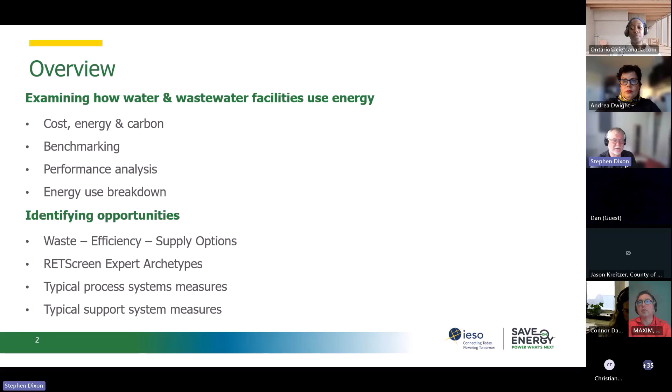Although process can use a lot of energy in these types of plants, what we found is that there's always a lot of opportunities in those support systems. Sometimes they don't see the same kind of focus as the process systems because it's not the core business of the plant. So great opportunities there as well.

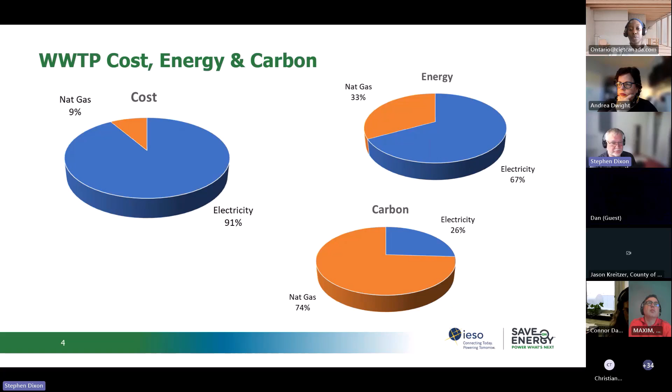So starting with these types of perspectives really sets the stage for what you might have to do, what you're going to go looking for, and the types of opportunities you're going to get into. So I always like to use these as a starting point.

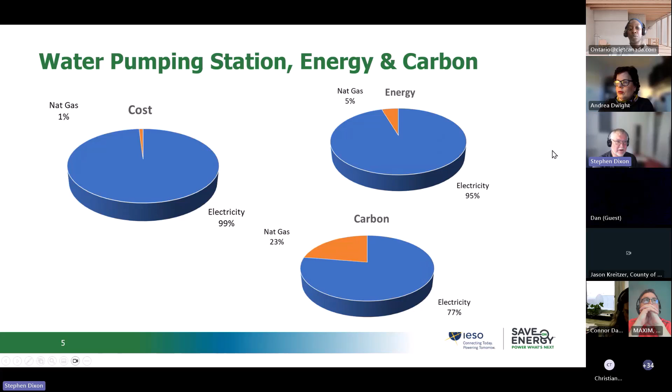The first thing we would do whenever we approach one of these plants is ask how much energy do they use, and how does that compare to the amount of process, to what they're doing. Typically, in a wastewater treatment plant, which I'm focusing on here, you would look at something like equivalent megawatt hours per megaliter, or gigajoules per megaliter. There are various different units, but basically the numerator is the energy and the denominator is the volume of water, wastewater, or processed fluids going through that facility.

I'll talk a little bit about performance analysis, looking at how that number changes over time.

But there certainly are ways within even Portfolio Manager to compare your plants to other plants, but also sector studies. And that I'm going to... go ahead.

Sorry to interrupt, Stephen, but there was a question in the chat, and I think we can answer it quickly now.

One question from the previous slide was: where is gas being used in a wastewater treatment plant? Typically it's used like in many other facilities in rooftop units to heat spaces like offices, but it's also used in the process, often for the digesters because they have to be heated. So often you'll use natural gas to heat boiler water that then heats the digesters. Sometimes you can use the biogas that comes from the digesters to fuel the boilers, but often it's natural gas as well. There are a few different places it's used.

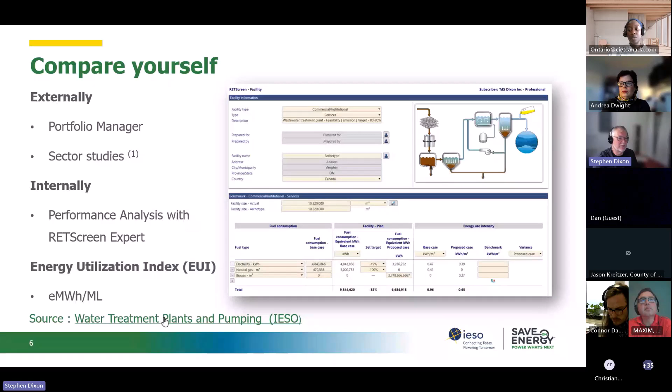All right, so Portfolio Manager does have allowance for these types of plants. Probably not quite as deep as you'd be able to use it for other buildings as a benchmarking tool, but certainly for sector studies. The IESO link here is a study that IESO did a few years back, which actually digs into the energy use in these types of plants. I'll give you a sample of what that might look like.

So benchmarking is always a really good place to start. We did a treasure hunt on a plant that was operating at 0.4, and we still found about a 15% opportunity through a lot of operational means. So just because you're operating really efficiently today doesn't mean you can't find opportunities.

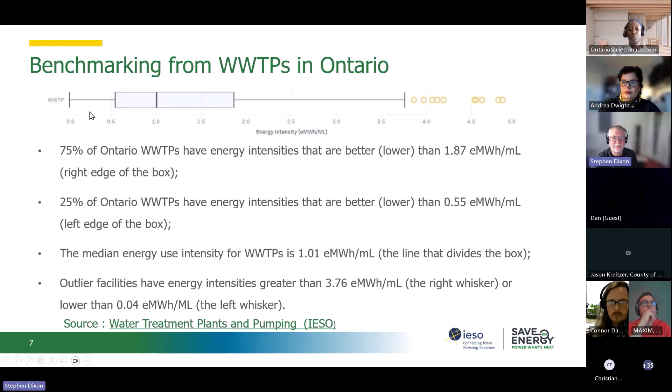So it's always good to go back and look historically. Sometimes it doesn't go up, sometimes it goes down, and you've made improvements you don't know about. This wasn't a bad thing for them, but it allowed them to establish a new baseline for performance monitoring in the future. So comparing a plant to itself over time is always a good thing.

You can do it on wastewater, which is what this is, but also on water treatment plants as well. I always like to make use of the interval data. Stephen, go ahead, there's an interesting question here. Maxim asks, why and how is weather a driver to electrical consumption?

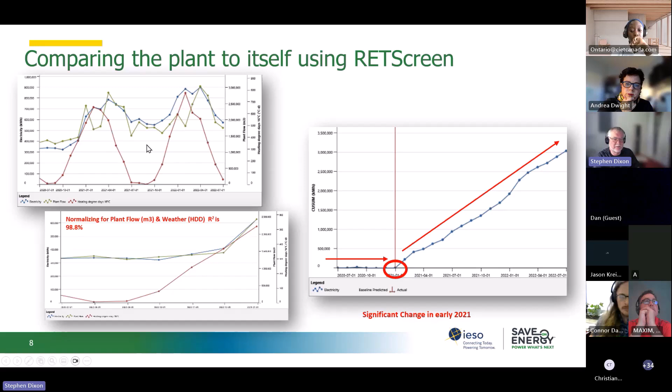And there are always really good correlations in wastewater treatment plants in particular between flow and weather and electricity use. You can see that here: the green line is plant flow, the blue line is electricity, the red line is the weather. So they're both significant in the equation for electricity, and RETScreen does it really nicely. You get multiple variables. Max, you probably already know that.

Right, so not just looking at your overall data as benchmarking, not just looking at your monthly data, but now looking at that fine data. And Andrea, you've got some great examples toward the end there of where you did this in plants, and the savings opportunities that came out of it because of that surprising thing called electric heat, maybe in a plant.

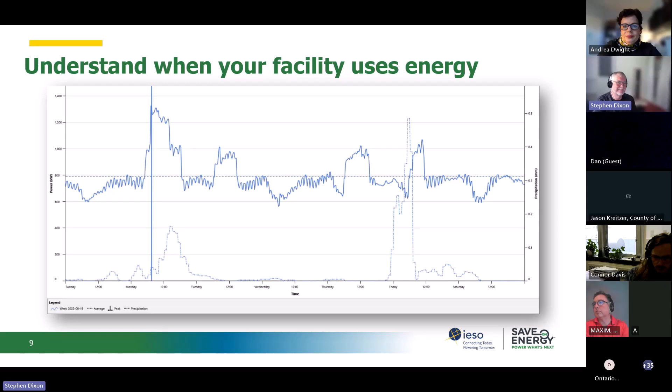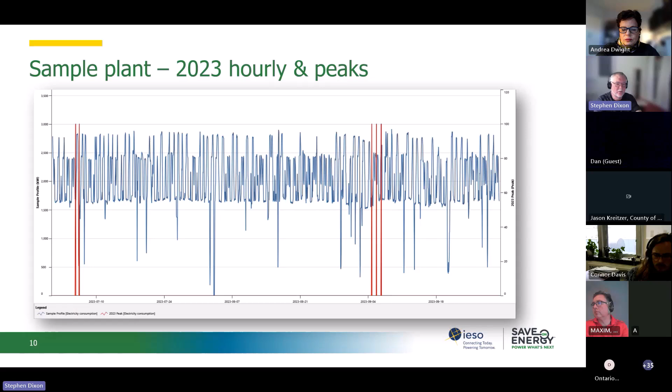The other thing, if your plant's big enough—in Ontario, under Class A, meaning if you're over a megawatt, you basically pay the global adjustment based on your contribution to the 5 top peaks—the interval data is very important there. We've done a lot of work with water pumping operations, larger ones, where we're looking at their impact and designing strategies for overcoming the impact they're having on those 5 top peaks.

That is, managing their response around peak times. We worked with a couple of water pumping operations, and they found it extremely valuable to be able to produce these graphs and put them in front of operators. The operators start to understand what they can do.

So again, that's all part of what we call our energy treasure hunt, where we're working collaboratively with the operational folks in the operation. It's about really bringing together the energy knowledge with the operational knowledge of the plant. I have a fraction of the knowledge of the operation of a wastewater or water pumping operation than the operators do.

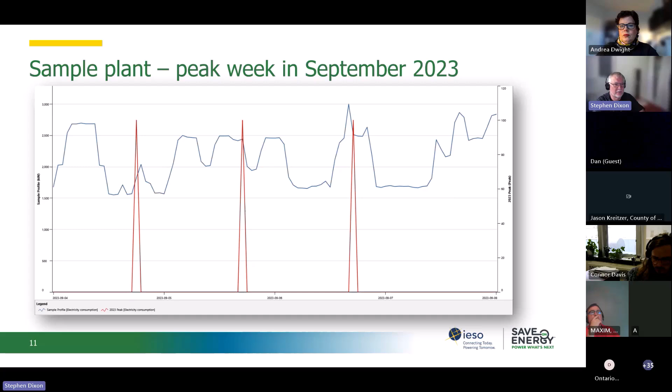They have a fraction of the knowledge of energy, but if we can come together collaboratively, I think this is where we can really find a lot of opportunities. And so I use the interval data to do that.

This is kind of neat. Polka dots? No, this is actually what we call a heat map, where I can look at the whole year. This is from a real wastewater treatment plant operation back in 2022, 2023. So here we can see the whole year. Every pixel is basically an hour in a week, and then we've got weeks across the year. So it's very easy to look at it. Now, in this case, it's relatively random, but sometimes you can see some very interesting patterns that emerge.

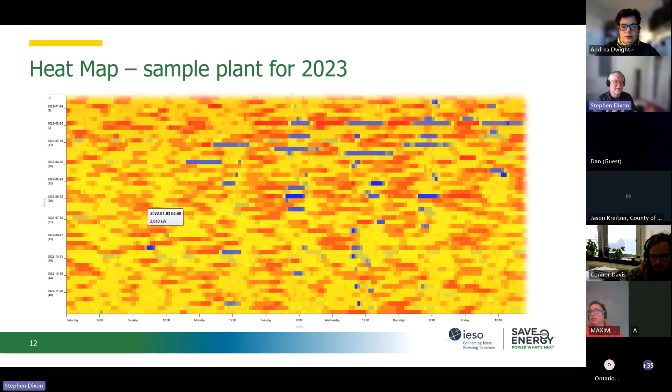So again, really good tools for digging into interval data, really understanding how your plant's using its energy, understanding where it's all going. And Andrea, you'll speak to this later, realizing how much you're actually using for space heat. Maybe it's a small percentage, maybe it's a large percentage, but being able to break that down.

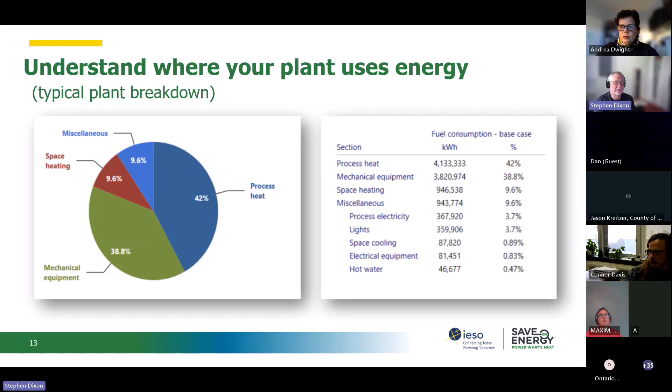This actually comes from some of the archetypes that we've created in RETScreen, which allow you to look at an archetypical or very typical plant, and then maybe start to model your own plant using these tools as well. So RETScreen does provide a pretty detailed breakdown. This is kind of like an audit in a box, in a sense, with the archetypes that are available.

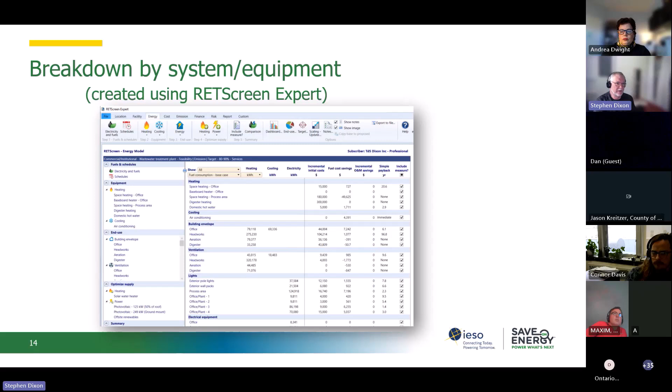When it comes to opportunities, and Andrea is going to get into the bulk of them here, but basically what I like to always think about is 3 priorities. Waste is the first priority. Energy you don't need to use, turning things off, turning things down, and properly controlling things.

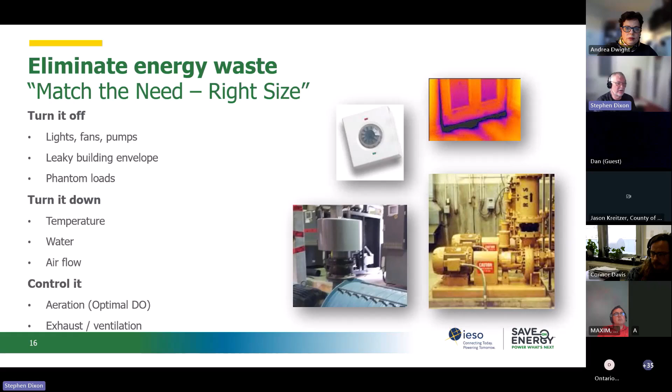Andrea will go into the details, say, of aeration and exhaust and ventilation in these plants, but basically it's about energy that we don't need to use. There's no use in over-aerating, because that can actually be as detrimental as under-aeration too. So again, making sure that we are meeting the need head on, whether it comes down to lights or temperatures or aeration or other types of energy use within the process.

Improving efficiency, how well we convert the energy from the purchased form, largely from an operational standpoint. If we have combustion equipment, we want to make sure that we're keeping it tuned up and controlling that equipment properly. Obviously, in general, we're moving away from combustion and the use of natural gas, but there's still a lot of opportunity in those types of systems.

Andrea, you talked later on about looking at it from the energy lens and realizing that pumps are not being operated in the right part of their curve, and resequencing and optimizing the operational strategy of the plants to find opportunities as well, without actually changing a pump, just utilizing pumps in a different way. So you're actually optimizing where they are in their curve. And then there's all the technological opportunities, but I like to focus on operation, maintenance, and optimization opportunities first before we spend capital.

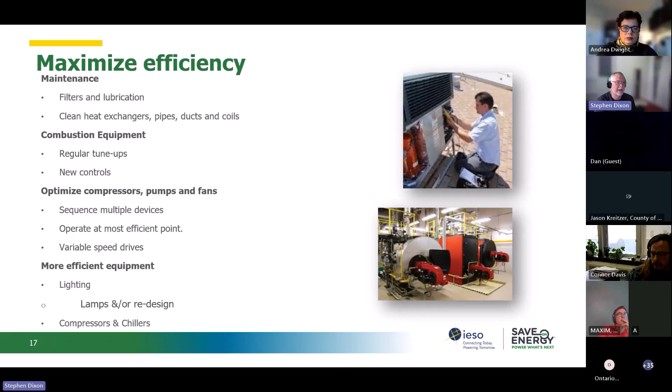But Andrea, you've got some ideas around how we can use technology to improve using capital as well. And finally, the supply side. So after we've reduced the waste and improved efficiency, we want to turn our attention to things like renewables. I put heat recovery in this category, the use of heat pumps, even biogas alternatives. What are we going to do with that biogas? Can we use it? So there's a couple of questions here.

How long can a plant turn off the blower to peak shave without compromising aeration? There's a great question there, Andrea.

Well, that's not one I can answer in 1 minute. Every plant might be different. There is honestly a period of time that you can manage a process without aeration. But here's another problem: not worrying about DO, you have to worry about all the solids dropping to the bottom of your aeration tank. So certainly you can pare back your blowers, but you really shouldn't turn them off, because you need to keep all the solids in suspension, if there are any, especially with a fine bubble. So I'm not going to get into that today, but I can take this offline and talk to you about how you might want to determine that for yourself on your specific process.

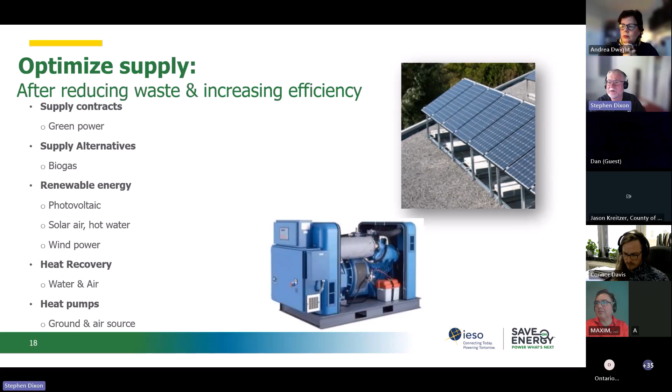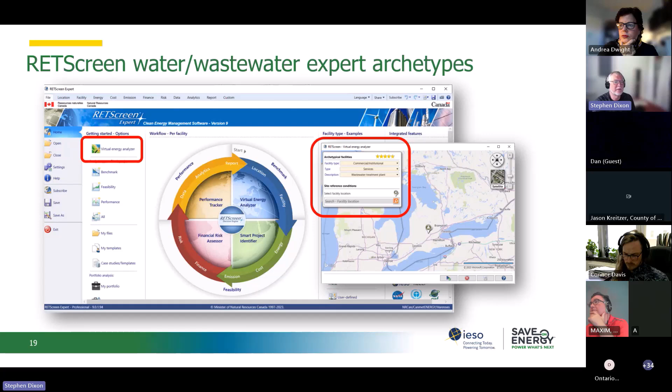Andrea, we're going to move on to your section pretty quickly, but I want to point out that even if you don't have a RETScreen license, you can download RETScreen and look at the archetypes available in the virtual energy analyzer. These are 4 predefined buildings: we built 2 for low energy and 2 for low carbon, one each for water and wastewater treatment, and they get into a lot of detail.

We analyzed a number of plants when we built these, trying to create archetypes that were typical—that's the definition of archetype. Not only do we show where all the energy is going, but we outline a number of key opportunities, so you can get a sense of what those opportunities look like and what the financial results look like for those types of opportunities.

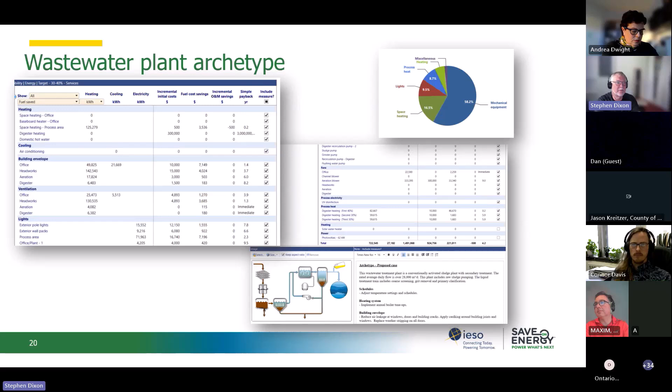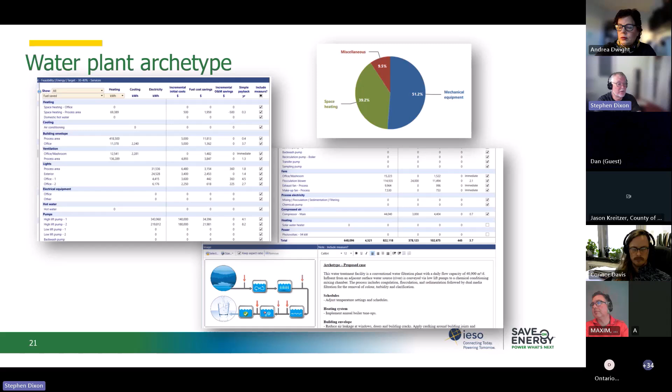There's a water plant archetype and a couple for wastewater as well, so have a look at those if you're interested. They give you a leg up. If you haven't done an audit on one of these operations, it's a good pro forma layout for doing an audit to figure out where all the energy is going and what the opportunities can be.

That leads us to more detailed discussion on some of these measures. Andrea, you're going to go through pumps, blowers, aeration, and UV systems. You'll look at variable frequency drives, and the idea that even though you can't reduce the number of pumps and maintain certification, you could add a pump of the right size for a particular function. Also making sure in your UV systems that you have turn-down—do you actually need full power to the lamp all the time?

Is there a way to actually modulate that or moderate that based on what the requirements are? And that whole idea of matching the requirement is a strong theme of a lot of things that you've done in these plants too, is to optimize the operation.

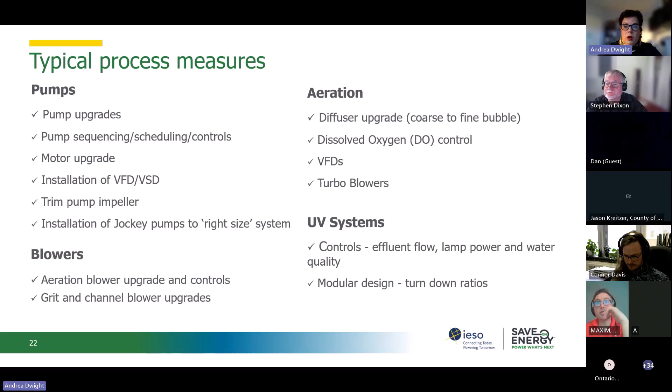Where I want to start is in the water side and water distribution and pumping, because I think that really affects everyone. So if you want to take a look at your water system, if you haven't already, I'm sure that it's operating where it needs to be from an operation standpoint. But if you want energy efficiency, you need to look at it from the energy lens. And there are some really quick things you can do that make a huge difference, like really pulling the pump curves from all of your pumps and making sure they're operating at the highest efficiency ranges, especially if you've had them for a while. Operation may have changed a little bit, and optimizing that is really important.

And the pump curve is there on the screen. We all know how to use those. But I also would say there are a few other things. If you have an older system and you have pumps where the flow is being controlled or throttled by downstream valves, that needs to be reviewed and updated as soon as you can. It is a very energy inefficient way of pumping water, and you should be replacing that kind of method of control with VFDs as soon as you can. Also, basic stuff like trying not to run your pumps in parallel, because that's very inefficient.

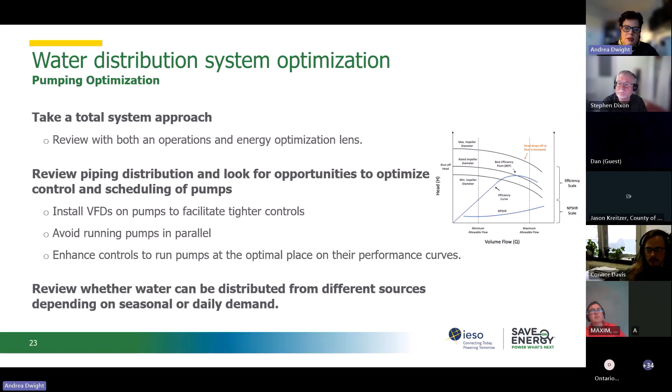Enhancing your controls and really looking for the optimal way of sourcing water to your water towers and through the system. So to go on with that a little bit, to speak to what we were talking about earlier, I think it's really important to be able to see what's going on with your pumps, especially your bigger pumps. So making it visible. If you don't have meters or sub-meters on your larger motors, I suggest that you actually install some, and you don't have to go for the financial grade expensive energy meters.

You can use amp meters, put them on all the 3 phases, and you could get wireless ones, and they can show you what's going on when your pumps are going on and off, and how much of a load they're carrying, so that when you start optimizing and looking for ways to make sure you're using the least amount of energy, you'll have a way of tracking it. Of course, VFDs already track energy, and they can be hooked up to your automation systems if you have them available.

And so what you really need to do is look at not just one pumping station at a time, but after optimizing a pumping station, looking at the whole system. Can you pump from different pumping stations at different times of the day or night? Which pumps are the most efficient? And try, of course, to keep your pumps as fully loaded as possible. In general, pumps that are loaded above 65-75% are the most efficient. Anything lower than that, and you're losing process efficiency.

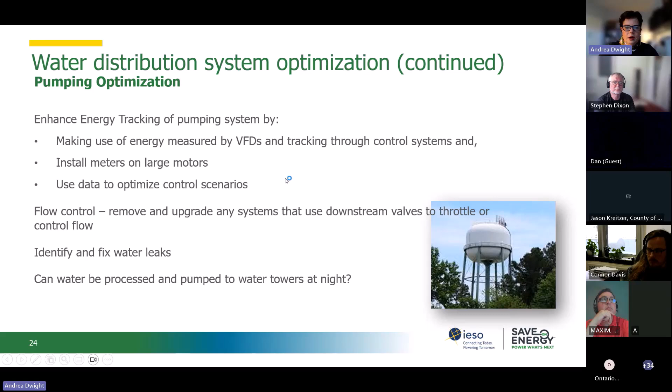Okay. So this is just a little example of an operations team I was talking to last week that had already done a few things with their distribution system. They'd removed some throttle valves downstream of the pumps and replaced the pumps and motors with ones that could handle VFDs, and also had looked at how they were staging the pumping, so it's optimized within some of the pumping stations. The next steps we had discussed were, again, looking at the pump curves and looking at different pumping stations to see if they could coordinate or stage the pumping from the various pumping stations, as they were all going to the same water tower.

So again, it might take a little bit of time, but it'll be well worth your time to take a look at that, sequencing properly.

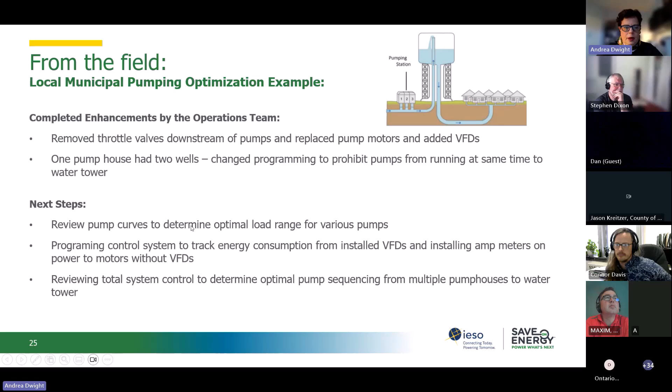So I'm going to change over very quickly to wastewater. And I wanted to talk about an example of waste that Stephen spoke about half an hour ago, when you're running more equipment than you require. We walked into an older wastewater treatment plant, and they had several grit chambers, I think 3, and they were using 2, and they had 2 blowers running.

And we determined that in actual fact, they'd been doing it for 10 years, and they put it on probably because of an issue within the operation, but then left them on. And we determined that they only really needed one of the 2 pieces of equipment to be run. So we saved a fair bit of energy by just shutting one of those blowers off. And of course, we had to go back to first principles, make sure that we were delivering the right amount of air to the system and it was well maintained.

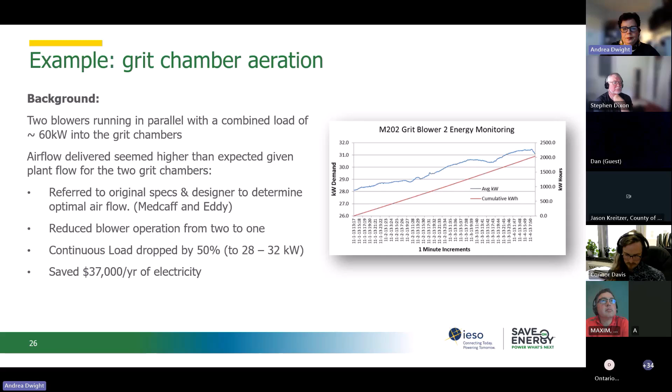But it just speaks to always questioning in your operation whether or not circumstances have changed and whether or not you really need to be operating all the equipment that you've got, whether that can be trimmed back to just what is needed.

Yeah, that's something that we see time and time again, not just in these types of operations, but sort of questioning the status quo, right? And I don't think it's meant to sort of accuse folks of doing the wrong thing. It's more about, is there a better way to do it, right? We've done it that way in the past, but maybe things have changed, and we find many opportunities through that type of approach.

So this is just another example of a plant in southern Ontario we were in, and the RAS pumps were very, very large. And that's very typical in most wastewater treatment plants. We plan for volumes that are for years to come. But right now, often the average day flows are much lower than the peaks or the design criteria.

So we had a pump that was running at 450 liters a second, but we had pared it down to 250 liters a second, and that still was more than we needed. And the system efficiency was quite poor because of that.

So what we were able to do in this case, I don't know whether it's in all cases, but most ECAs will allow you to put in an additional pump like a jockey pump if you have physical space for it. They found a pump on site, they installed it that was right sized, and they were able to operate at the right place on the efficiency curve.

So they certainly saved energy, but the best thing that they found was they were able to better control their sludge blanket, because they were running at the maximum turn down ratio. They had no flexibility to manage their operation. So this gave them an operating range that allowed them to steady state their system.

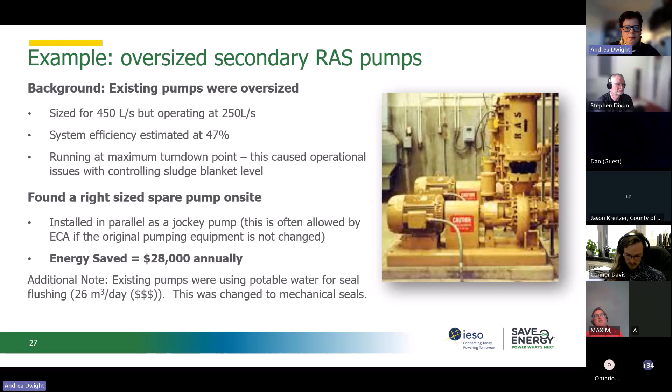Okay, the elephant in the room in wastewater is aeration, but really it's any kind of system that moves air. It's very inefficient. It's also very necessary. So it could be blowers that you're using for channels, or it could be aeration, or it could be just compressed air in your maintenance shop that you use to blow stuff off. It's very inefficient. So you have to make sure that you're using it as preciously as you can and using only as much as you need.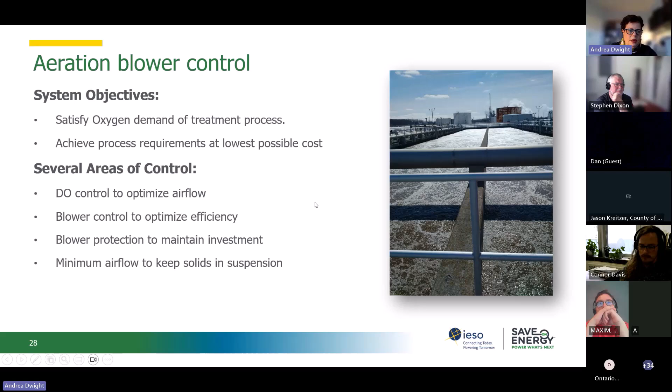So there's several areas that you want to focus on that I think are very important, including controls, and let's get into it a little bit here. So DO control: you want to make sure that your sensors are maintained. You may think that just a small amount of drift won't make a big difference, but it does. The location of the sensors is very important.

And also, if you have multiple basins and you have a header with automatic control valves on that air header, consider looking at most open valve control, which, I won't go into detail now, but it really keeps one of the valves open at all times, the one for the basin that needs the most air. And it reduces your system's pressure and improves your performance across the board.

The other kinds of things: if you have fine bubble, diffuser cleaning and maintenance, control valve maintenance to make sure that they have a full range, and air balancing of your system is really important. Right sizing, turn down ratios.

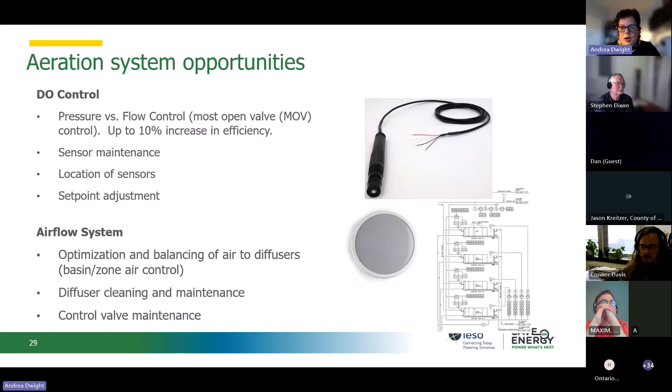Now, I remember that one, the energy treasure hunt, the energy scan we did outside of Ontario, Andrea, and they got 11% savings out of that MOV control, right? I remember that specifically. So yeah, 10% is pretty close. It takes a little bit to get it put in, but it's very successful.

Energy savings. A few obvious things. If you have mechanical aeration, then you should be looking at higher efficiency blowers and maybe fine bubble. But if you don't have the funds to do that right away, then make sure you have VFDs on your blowers, make sure you have VFDs on your mechanical aerators, and ensure you have filter maintenance.

So these are some pictures from various wastewater treatment plants where these are filters to air vanes that were supplying air to the blowers. And you can see that the filters are pretty dirty, and the blowers are still operating. The operation is still running perfectly, but they're running inefficiently. And don't underestimate the amount of energy loss that you achieve through higher pressure drops across dirty filters.

The other picture I have here is this red picture with a circle around it. A particular plant had a temporary blower put in place with temporary tubing, and there was a very small air leak here. And because the operation again was running effectively, they didn't think that it was a big problem, but we calculated that they were losing hundreds and hundreds of dollars of electricity by pushing air through this hole instead of putting it through the aeration basins.

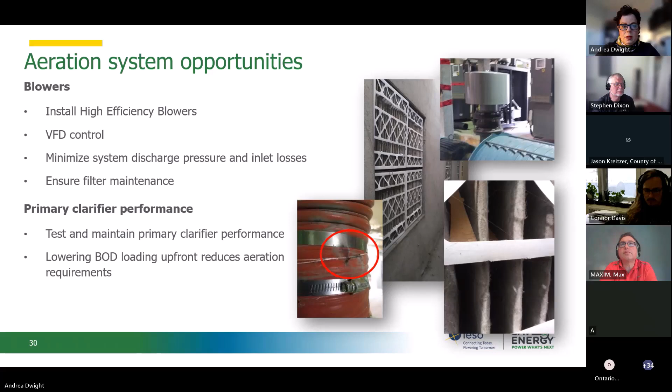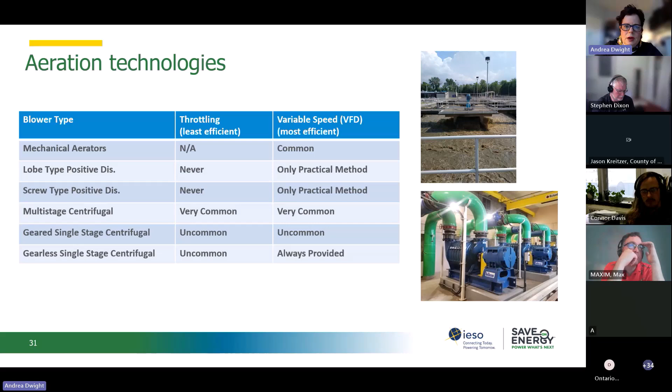Okay. All right, so I'm going to go through this. These are various different aeration technologies. I'm not going to go through this at the moment, but obviously you want to put variable speed drives on your blower technologies, and if you can move towards the turbo blowers, that's probably your best endpoint eventually.

And there are numerous design considerations that we unfortunately don't have an awful lot of time to go through right now. But you have to look at your summer and winter loads. You want to look at what type of bearings you might want. And there are some advantages, disadvantages and limitations to turbo blowers as well. So happy to do that for anyone who would like a further discussion.

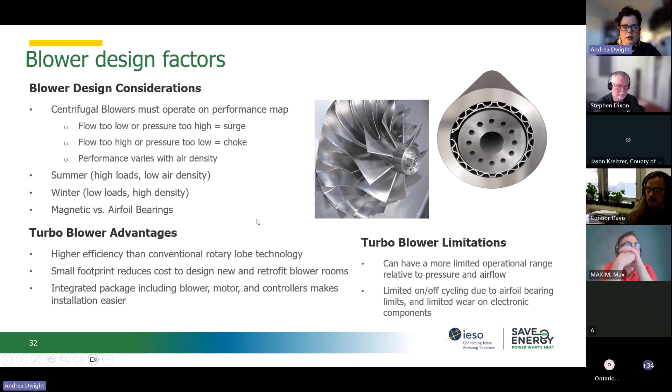We can get into that later. But we need to get into support systems. So Stephen, do you want to do an overview?

Yeah, I think these systems are really not unusual to many people. Obviously, depending on the type of plant, you can actually run a lot of air for ventilation. So moving that air, and if the space has to be heated or at least tempered anyway, that can require a lot of heat, either electrically or from natural gas.

There are opportunities, obviously, to do some heat reclaim. Controls are always a good one. Again, I think what you're finding, and you've got a few slides later on to speak to this, is a lot of times heating is not well controlled, and that's an expensive situation, but it can be remedied for good savings.

A lot of the other things you'll talk about, Andrea, in terms of compressed air measures. Again, compressed air is extremely expensive. 100-pound air is about 5% efficient, right? So if you're buying electricity even cheaply at 10 cents a kilowatt hour at 5% efficiency, that means your compressed air is worth $2 a kilowatt hour, right?

So do you really need to use compressed air? Can you find something else to do the same job? We've seen that in many situations where eliminating the use of compressed air, going by another means, it's actually a lot cheaper, a lot less energy.

And then there's the energy recovery from various different sources within the plant. So again, don't ignore these systems because they tend to get overlooked at times in the focus on the process. There's good opportunities here, as Andrea will show us.

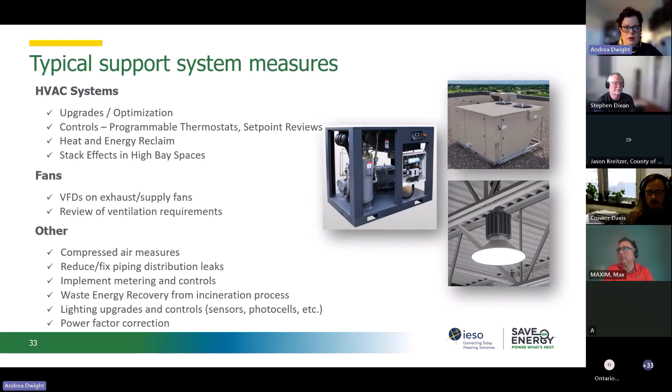Yeah, that's great. Thank you. So we're just going to talk a little bit about some opportunities that I saw in various plants regarding the support systems. And I wanted to talk about HVAC controls and not to underestimate the contribution electric heating has on the overall demand of the plant.

And what you can see from plotting this data and thinking about how systems work, because we could see such a steep step change, it really told us that the control systems weren't working. So the heating systems weren't coming on gradually as heat was required to maintain the space temperatures; they were all on or all off. So the plant did a fair bit of work to replace the controls on the units themselves with programmable thermostats, and they were able to drop that substantially.

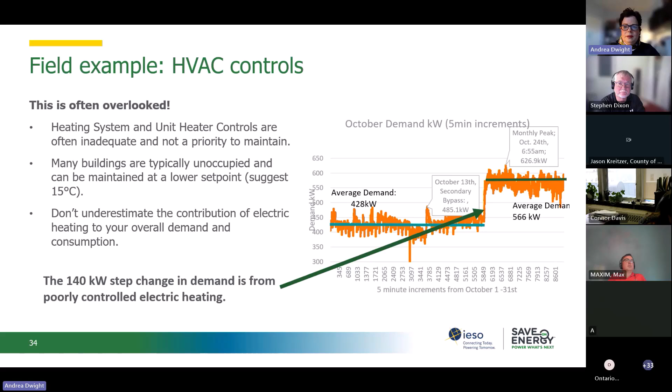So we took a look at it, and there were some very small things we had to do which made a big difference. One of the thermostats was accidentally located in an unheated staircase instead of in the room, so it needed to be moved. I believe it's because they decided not to put in an explosion-proof thermostat, so they had to locate it in the stairwell. So we replaced it with an explosion-proof thermostat and put it in the right space, and they were able to reduce their natural gas significantly.

In addition, we looked at ventilation. The ventilation needed to be much higher than other spaces on site. However, in this case, it was over-designed, and they were doing many air exchanges that they didn't require. This was in the middle of the winter, so you can imagine when it's minus 15, they were pushing out a whole bunch of warm air and then having to reheat fresh air unnecessarily.

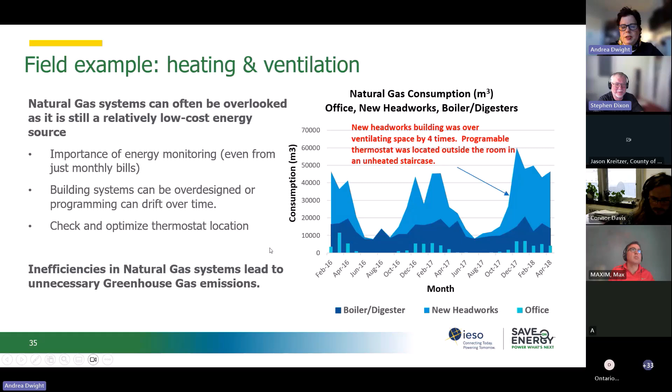So check it, challenge it, but it never hurts to ask. Yeah, it never hurts to ask. Thanks, Jesse, for bringing that up.

This is another one where some systems were running when they didn't need to. Basically, it was a plant that had a bypass system, with a full building and equipment for bypasses. For those not in wastewater, that's when there's a large rainfall event and the volume is too high for the plant to handle through the main system. So there's a bypass system of various types to manage that extra volume. In this case, the plant would use it about 20 days a year, with about 12 or 13 events a year.

What we did was some sub-metering—we simply slapped a meter on the panel for that particular building and ran it for a couple of weeks. We found that the system was running over 50 kilowatts of energy, even when it wasn't in operation. So we were able to relook at it and question why, when the building is shut down. We found some odor control systems that didn't need to run, and other things that just hadn't been controlled properly to shut down when not needed. They were able to save a fair bit on consumption and demand savings.

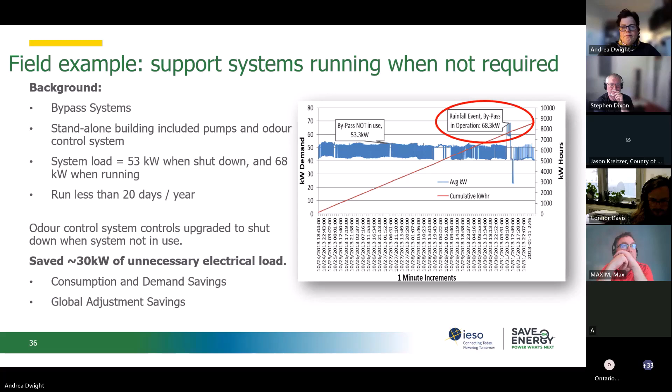There's a question from Sky: could you explain again about the value of each peak for the GA? What it comes down to is if you look at your global adjustment, your peak demand factor calculation—you can get the details from your own PDF calculation—but it turns out each peak is worth about $60. If you hit all 5 of them, that's about $300. So the idea is if you can drop those peaks down, each one is worth roughly $60, though everyone's specific—that's just a round number, $300 for all 5. Per kilowatt, that's $60 per kilowatt for each peak, times 5 peaks is $300 per kilowatt for all 5 peaks.

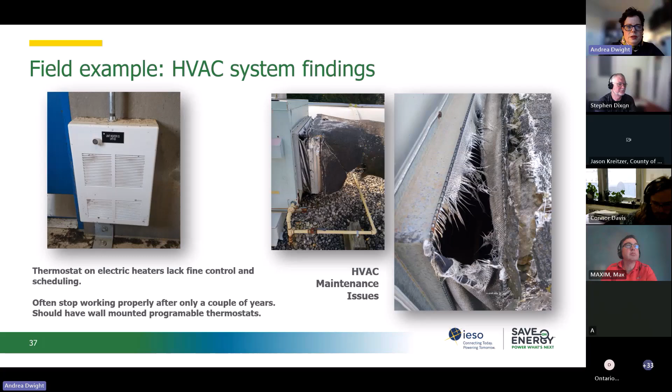Okay, great. That's awesome. So I'd be remiss if I didn't talk about building envelope on water and wastewater plants, whether it's just fixing the gaps around doors or in older facilities, windows that can be left open that are really hard to reach and don't end up being closed in the wintertime. And of course, any single pane windows need to be replaced because they don't have thermal integrity.

And even 2-pane windows, fenestrations, can have problems with infiltration if they're not maintained. So looking into that is important, especially if you're heating through electricity for cost, or natural gas. If you're heating, it'll reduce greenhouse gas emissions as you carve back that natural gas use.

I wanted to do one other item that seems like it wouldn't be a big deal, but if you have any buildings that are 2-story or high bay buildings, it's really important to have destratification fans. If you have them, make sure you're using them in the wintertime. If you don't have them, they're not that expensive to install, and they actually save a significant amount of heat energy by pushing that hot air at the ceiling down to where humans are working.

And I've done a fair number of studies in various different buildings, and it's one of the most cost-efficient ways of reducing your heating bill. You can calculate that using RETScreen. And also, if you're considering a solar wall, they actually work very well in wastewater treatment plants too. I have a case study from northern Saskatchewan, but you've got a picture of a solar wall later, Andrea. A solar wall, one of the ways it contributes is that it implicitly destratifies the air in the space typically. So kind of a double opportunity there.

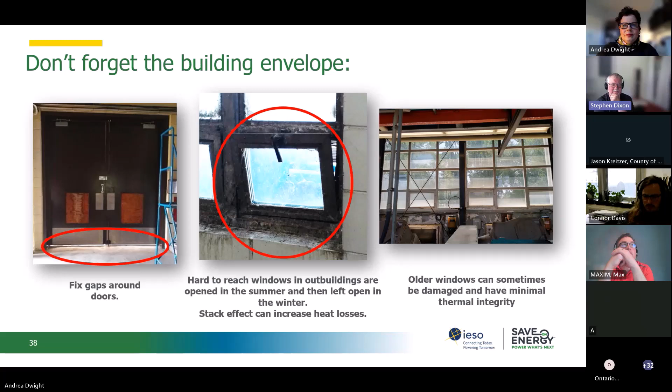Yeah, that's excellent. So I don't have much time here, but I'm going to flip over to other resources for a second. Water consumption - sometimes this gets lost, whether it's effluent water in a wastewater treatment plant or seal water in a water treatment plant. Anywhere the process is using water, you're also using energy to convey or pump that water to the systems. In this case, we had an example where we had a compactor conveyor and headworks, and we just noticed the water was on even when that conveyor wasn't running, so we were able to turn that off. We also found they were using potable water instead of effluent water, and the charges were extremely high. So we were able to save by just observing when things were working and updating controls.

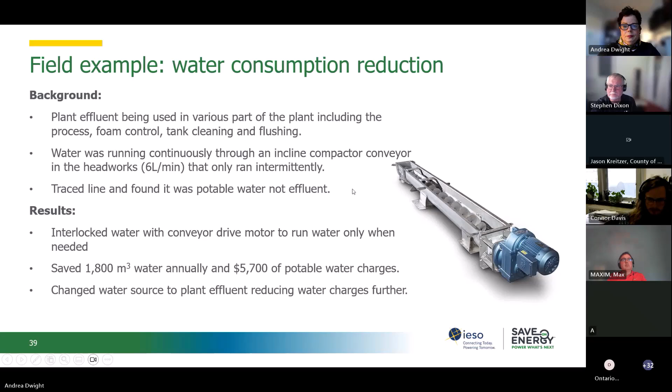Yeah, one of your previous examples was seal replacement. I did a calculation on it - it's about $25,000 a year in potable water potentially, to change from a water-cooled seal to a mechanical seal.

This is another one, basically putting a meter on the effluent pumps on site. We did it for a week, and we found the cycling of the pump was much more frequent than expected. We were able to find two leaks, fix them, and we were able to reduce the energy on those pumps by 25%. But more importantly, we were able to reduce the amount of cycling, which will improve the life of those pumps.

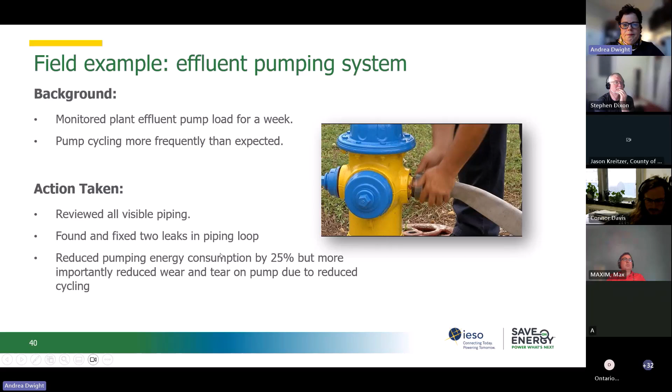And 4 minutes. 4 minutes? Okay, so I'll just quickly go through here.

We'd be remiss if I didn't talk about renewable energy sources, considering solar walls - I'll let you look those up. They're very, very simple but effective, no moving parts, and they take preheated air from the side of your building and use it to preheat heating air. Second would be micro hydro turbines.

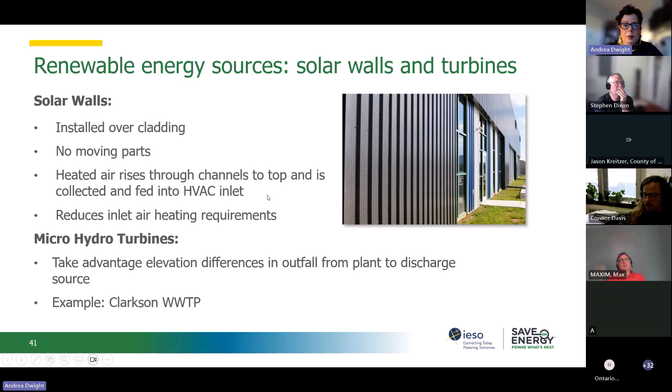If you have a large drop at the end of your wastewater treatment plant between the outfall and the discharge source, you can make use of that drop and turn it into electricity. They've done that at Clarkson wastewater treatment plant if you want to take a quick peek later on. And both of those things can be modeled in RETScreen. Heat recovery, of course, as well.

I encourage you to take a look at the Toronto Western Hospital program, where they're using a sanitary sewer trunk to pull heat from and heat the facility. So I think that's it for me, Stephen. Thank you very much, sorry it was so quick.

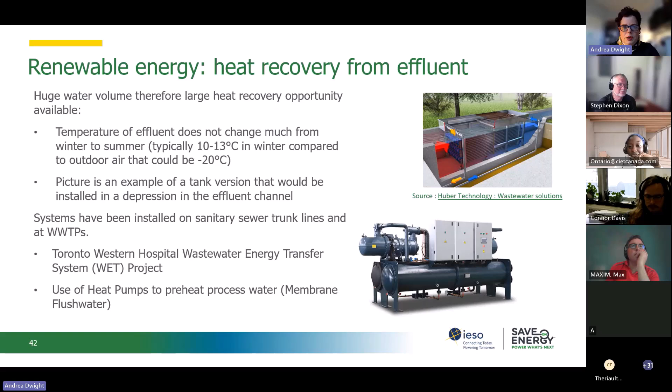No problem. You want to go to the next slide there, and Mintu can take over, she'll remind us about the coaching. Thank you, Andrea. So before talking about the coaching, I'm just going to talk about the resources we have on the IESO website. We have multiple resources, other webinars and fact sheets, you can have M&V templates and other practical guides.

And for the one-on-one coaching, if you have an energy efficiency project and you want to talk to an expert, this is the opportunity to talk with an expert directly. If you have any question, if you want to go through your project or you have any opportunity and want to talk about it, feel free to reach out. I'll post the link in the chat. I just wanted to go quickly because I saw other questions that were maybe interesting to mention here.

So the other question was from Jesse, I think: do solar panels typically provide better return than solar wall? I think it was for Andrea. Yeah, that's a hard one to answer, I'd have to model that in the situation, but I think solar electric might be better if you've got a load. But again, I'm going to hedge my answer on that one without doing the analysis. I've seen some pretty quick returns on solar walls, so that's why I'm a little hesitant.